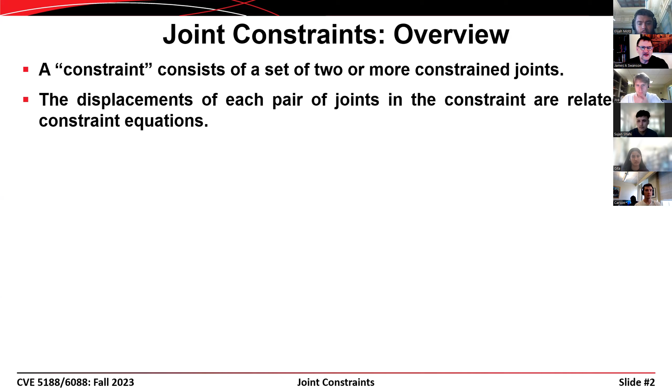When we used to offer a full 10-week course on matrix analysis of structures, we would do that sort of thing. But nowadays, when I'm only having 5 lectures on matrix analysis, I don't get that far anymore.

All right, so the types of behavior that we like to model are rigid body behavior, equal displacement behavior, or symmetry or anti-symmetry conditions. Sometimes it's more efficient to only model half of a structure so that the model size remains small, and then you can impose a symmetry constraint there such that all the displacements remain in plane like they would in a symmetric structure.

And you guys, I think, talked about that a little bit in your undergraduate analysis courses, where you talk about how to make problem sizes a little bit smaller.

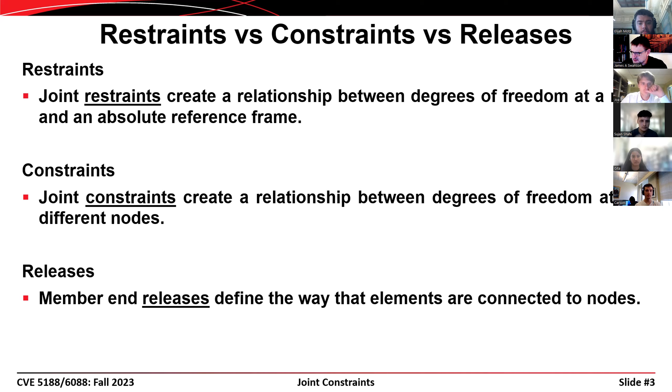So here are the others that I mentioned. A restraint defines a relationship between a node and an absolute reference frame, and a constraint defines a relationship between a node and another node. And then there's a release that allows us to incorporate things like pins and things like that.

So these are the types of constraints that are included in SAP 2000. We have a rigid body, we have a rigid diaphragm, a rigid plate, a rigid rod, and a rigid beam. And so I'm not necessarily in love with the names that the people at Computers and Structures gave to these different constraint types, but this is what we have to work with.

If you go into other packages like Abaqus or ANSYS, they have constraints that we use all the time.

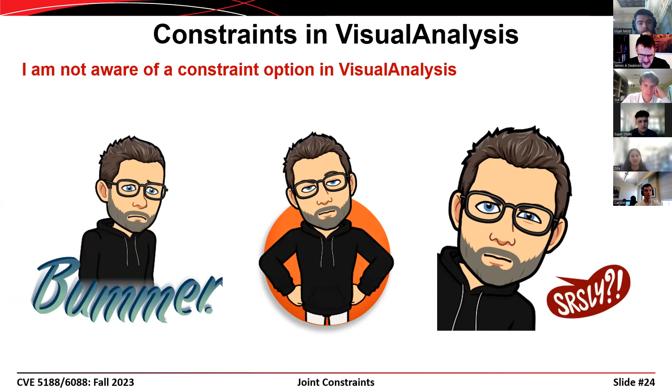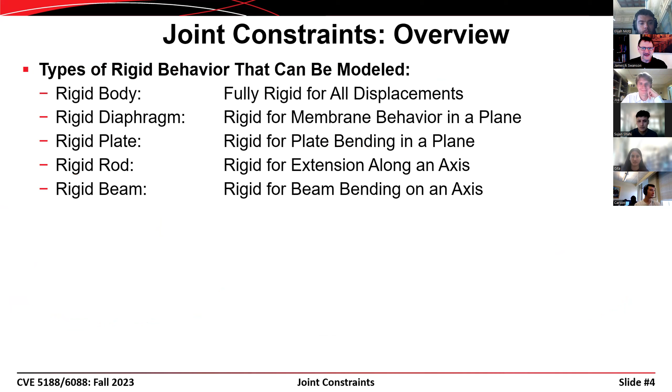They go by different names in those packages, but they are basically the same types of constraints. You'll find out on the last slide that when we look at VisualAnalysis, there aren't any constraints available, which is a serious limitation. But VisualAnalysis is what it is. It's a good low-level package for introductory level stuff. Let's hope the people from IES Web don't tune into this recording and yank our educational version, because I'm not entirely supportive of the package.

When we use constraints, it reduces the number of simultaneous equations we have to solve. So if you start with, say, 9 degrees of freedom in a model, and you say that degree of freedom 3 has to equal degree of freedom 5, you've removed one of the unknowns from the system. Instead of a 9 by 9 system of equations, you now have an 8 by 8 system remaining. So that's one advantage to using constraints, making the problem size smaller.

But more often than not, we're going to use constraints to model a condition academically or analytically in a way that's different than what it's actually portrayed in the actual structure.

Most constraints are defined with respect to a coordinate system, either the global coordinate system or a local coordinate system for a node or member, or an alternate coordinate system that can be defined specifically for that constraint. When we looked at diaphragm constraints on Tuesday and implemented them in our brace frame model, it automatically determined what the coordinate system was for those diaphragm constraints.

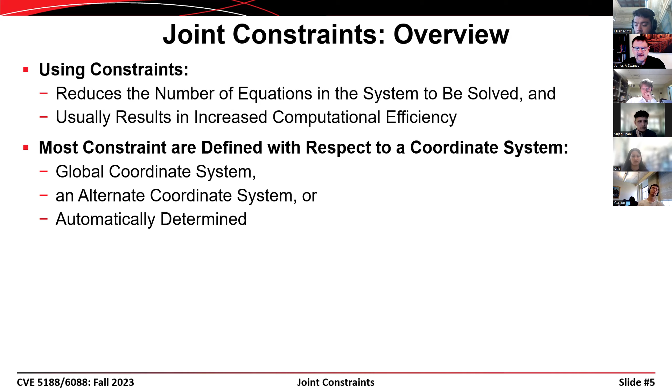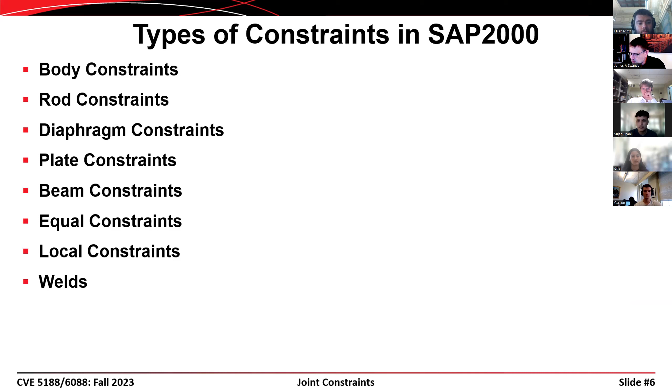So here, the body constraint, rod, diaphragm, plate, beam, equal, local, or welds - there are other ones I didn't include in the list before. Taking the descriptions from the SAP 2000 manual, the body constraint causes all of the constrained joints to move together as though they were a rigid body.

That can be useful if you're modeling the end of a beam, for example, and you want to connect the node at the end of a beam with a node at the column line. You can use that body constraint to impose rigid body motion of that group of nodes to mimic a rigid connection in a steel building, for example. All degrees of freedom are connected.

The subset of the degrees of freedom can also be defined. This is used to model rigid connections where several beams and columns frame together. It can be used to connect different parts of a model that were defined using separate meshes, and it can also be used to connect frame elements acting as eccentric stiffeners to shell elements. We haven't talked about shell elements yet, but that's coming up soon.

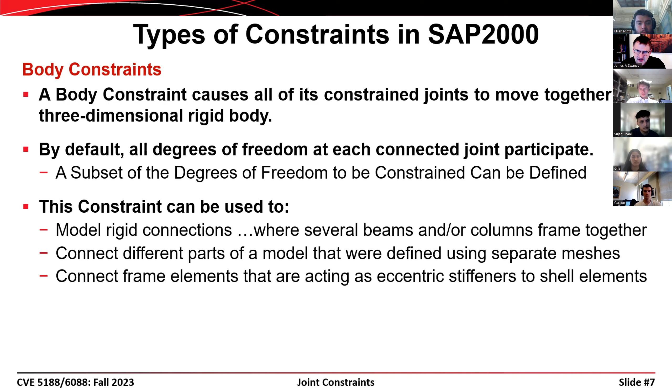There's a rod constraint that causes all of the constrained joints to move together as a straight rod that is rigid against axial deformation. Effectively, all the joints maintain a fixed distance from each other, but translations normal to that axis and all rotations are unaffected. This can be used to prevent axial deformations in frame elements, model truss-like links, and it can actually be used to model diaphragm behavior as well.

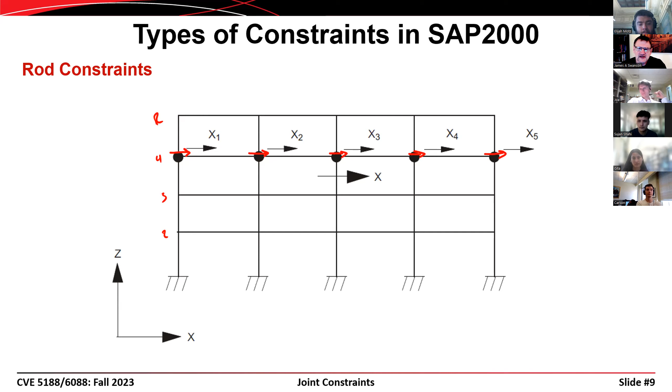What that says is the horizontal displacement at each one is going to be equal to each other. You'll end up with some displacement delta, and it's the same at all 5 joints. If you impose a rod constraint at each of the 4 levels in this structure, that would be equivalent to defining diaphragm behavior for each of those 4 levels. That works well in a 2-dimensional structure, but the actual diaphragm constraint we'll talk about in a minute is more elegant in performing that. So if the axial deformations in beams are negligible, a single rod constraint can be defined constraining the 5 joints.

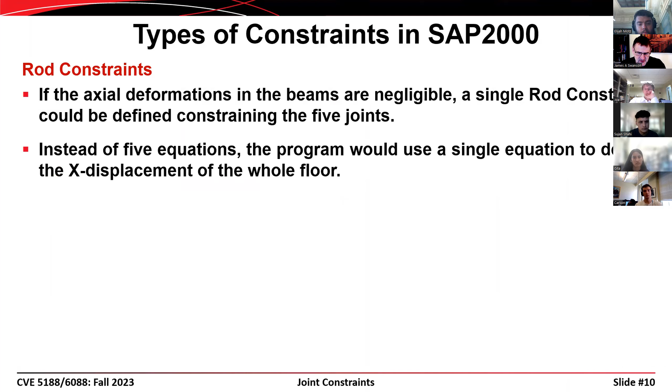Instead of 5 equations, the program would use a single equation to define the X displacement at that whole floor. However, it should be noted that the axial forces that result from that analysis in those beams will be equal to 0. So if you're worried about diaphragm forces, in-plane forces within the floor slab or roof slab, then that rod constraint can give results that are not accurate when you go in and design those diaphragm members for chord forces and things like that.

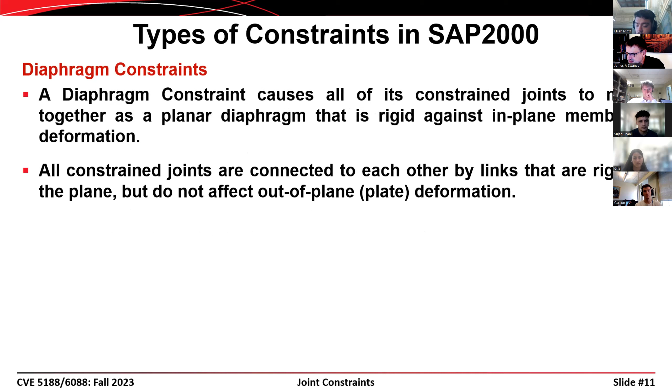Okay, here's the diaphragm constraint. This is by far the one we'll use most often in this class. It causes all of the constrained joints to move together as a planar diaphragm that is rigid against in-plane membrane deformations. All constrained joints are connected to each other by links that are rigid in the plane, but they do not affect out-of-plane deformations, either vertical deformation or rotation.

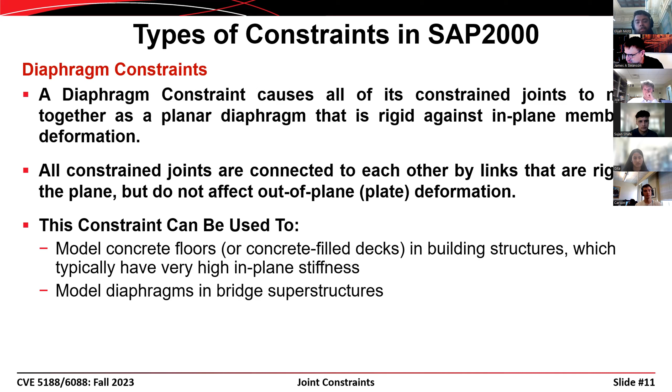This constraint is used to model concrete floors or concrete-filled decks in building structures, which behave with a high in-plane stiffness. They can be used to model diaphragms in bridge superstructures as well.

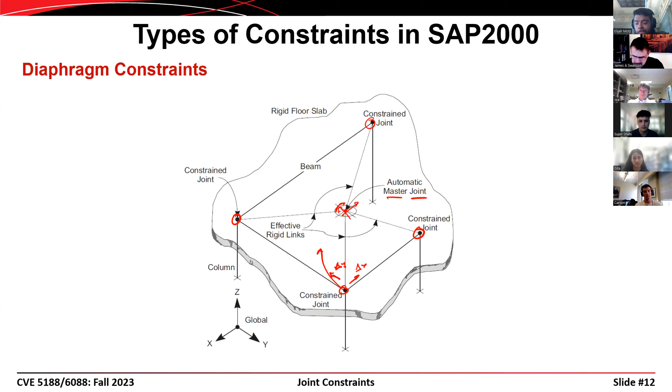And so that's very useful, very helpful, in that everything is taken care of automatically after you define the constraint and assign the joints to that constraint definition.

All right, the use of the diaphragm constraint for building structures eliminates the numerical inaccuracies that can result when you have large in-plane stiffness modeled using membrane elements. You could also use shell elements to model the floors or the roof. We'll do that. But sometimes, even if you have shell elements, it's nice to use a diaphragm constraint.

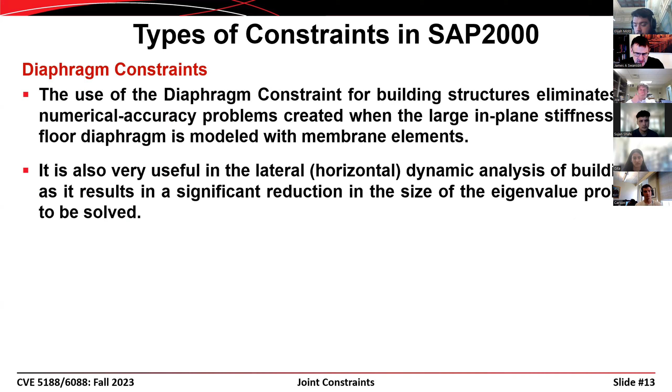It's also useful for lateral analysis of buildings as well. It results in a significant reduction in the size of the problem. And it has an added advantage in SAP 2000 in that it allows lateral loads to be applied much easier than in the absence of a diaphragm constraint.

I'll show you this when we get to SAP 2000 later today, but one of the last things we did in our model demonstration on Tuesday was we applied the lateral loads that were resulting from wind at each of the levels. That's rather tedious to do when you apply them as nodal loads or as joint loads. When we use a constraint, it becomes much more straightforward to do that. I'll get back to that.

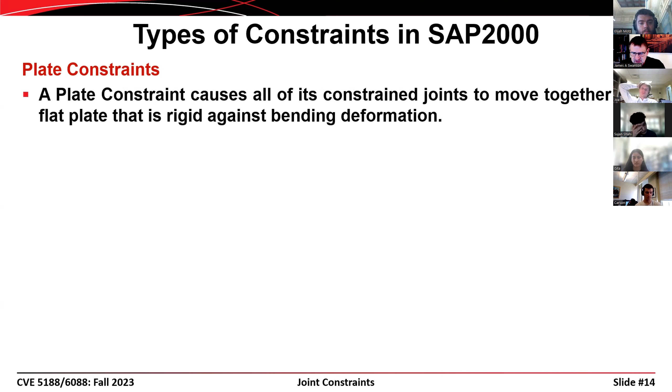Here's a plate constraint. The plate constraint causes all of the constrained joints to move together as a flat plate that is rigid against bending deformation. So this is a little bit different than the diaphragm constraint. With the diaphragm constraint, it's rigid in plane, but all of the nodes are free to do whatever they want perpendicular to that plane.

The plate constraint is basically the opposite of that. Everything is free to move around in the plane of the plate, but when it comes to out-of-plane deformations, then they are constrained.

This can be used to connect different types of frame and shell elements to solid elements. Solid elements don't have rotational degrees of freedom at their nodes. So this constraint can be used to connect a rotational degree of freedom from one node and pair it as a pair of translational degrees of freedom at other nodes.

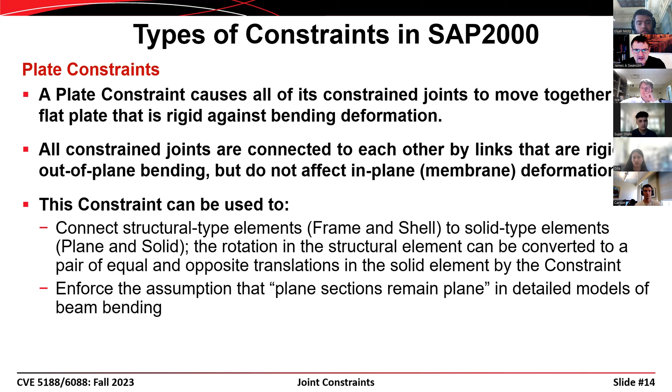It can also be used to enforce the assumption that plane sections remain plane if you do a detailed model of a beam using shell elements or solid elements.

Here's a beam constraint that causes all of the constrained joints to move together as a straight beam that is rigid against deformation. So this is the 2-dimensional equivalent of the 3-dimensional plate constraint. If you only have it working in 2 dimensions, then you can use the beam constraint instead of the plate constraint, and it's a little less

computationally expensive. So the analogy could be created between a beam constraint versus a plate constraint, relative to a rod constraint and a diaphragm constraint. So in 2 dimensions, you could use a rod.

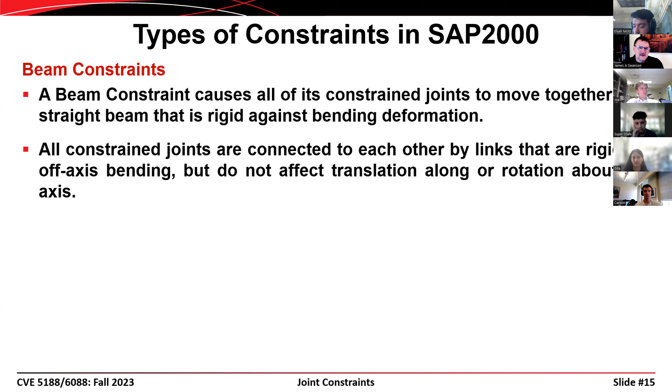In 3 dimensions, you use a diaphragm. In 2 dimensions, you use a beam. In 3 dimensions, you use a plate. Again, similar to what we just discussed with respect to the plate constraint, only working in 2 dimensions.

Then there's an equal constraint. This one is interesting. It basically sets the constrained degrees of freedom at adjacent nodes equal to each other. It's not like a rigid body constraint where if we had, say, 2 nodes and they were constrained using a rigid body, then they might move up like this, which would be a rigid body translation between those 2 nodes. Instead, if you have the equal constraint and both of these nodes rotate, then what tends to happen is this node moves up to here, and then this node moves up to here as well. So the degrees of freedom are actually equal to each other as opposed to moving as a rigid body.

There's no coupling between rotations and translations. This can be used to partially connect together different parts of a model, such as at expansion joints or at hinges and things of that nature. For fully connecting meshes, it's better to use the body constraint when the constrained joints are not exactly in the same locations. Here is a local constraint.

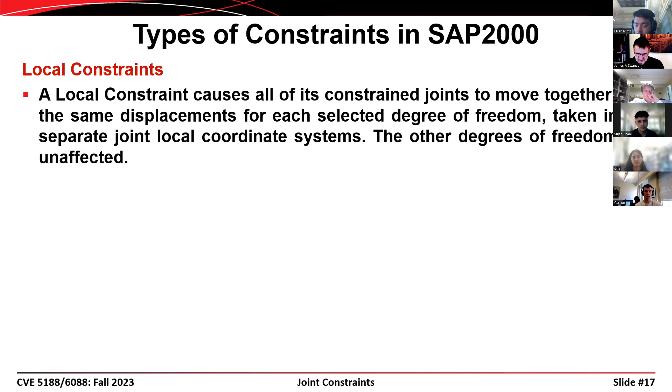Local constraint causes all of its constrained joints to move together with the same displacements for each selected degree of freedom, taken in separate joint local coordinate systems. The other degrees of freedom are unaffected. It doesn't use a fixed coordinate system, but references the local coordinate systems instead. There's no coupling between rotations and translations, and it works out to be the same as an equal constraint if all of the constrained joints have the same local coordinate system. So this can be used to model symmetry conditions. It can be used to model displacements constrained by mechanisms.

So let me go and illustrate. Let's suppose you have 2 nodes, one here and one here. And now we define degrees of freedom for these nodes. Maybe that's the 1 degree of freedom, maybe that's the 2 degree of freedom, and then that's the 3 degree of freedom. Over here, then you could have that perhaps as the 1 degree of freedom, that's the 2 degree of freedom, and then that's the 3 degree of freedom.

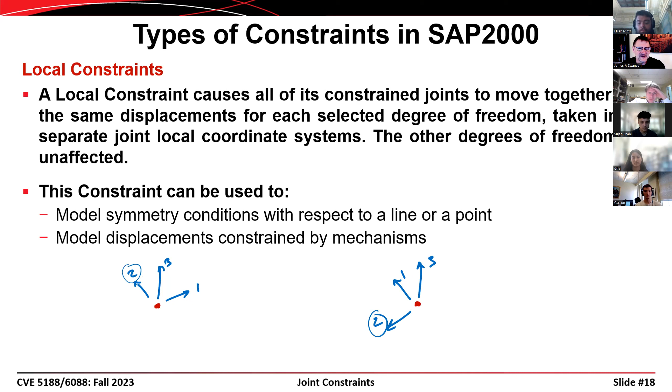So you could set displacement in the 2 degree of freedom over here equal to displacement in the 1 degree of freedom over there. That would be the same as an equal constraint. Or you could go and set the 2 degree of freedom there equal to the 2 degree of freedom there. I don't really know where you would use this, but it's available if you come up with some kind of an academic problem where that would be useful.

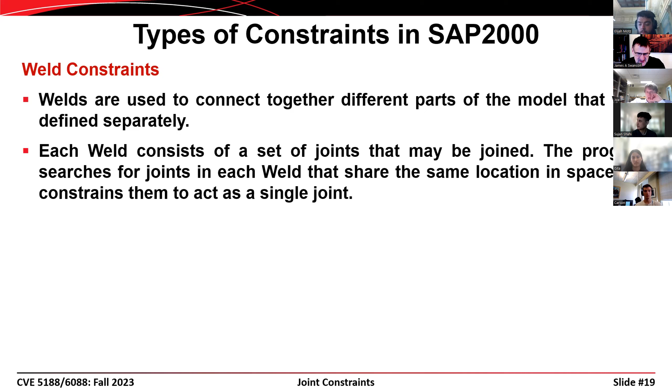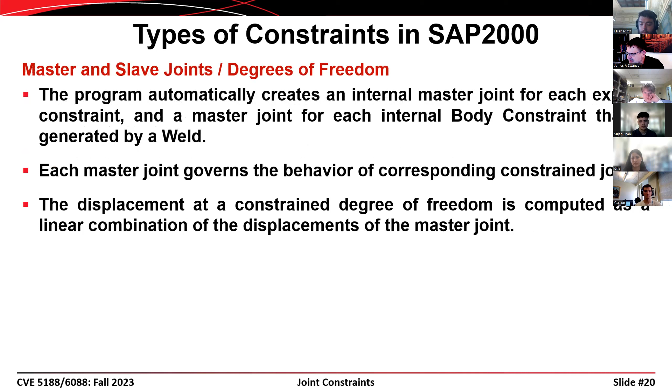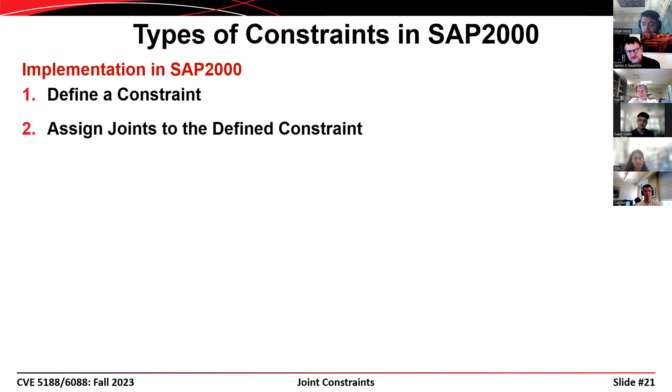So when we go in and look at these in SAP 2000, the process we use to implement a constraint in a model is: we have to define the constraint first, and then assign the joints to the constraint that we defined. In most cases, we're going to use a diaphragm type of constraint, and then we go in and assign the nodes that we want constrained to the diaphragm constraint that was defined. The way you do the first step is you go into the Define menu, Joint Constraints, and then you can define which type of constraint you want and which of the options you want to include.

Most of the time we construct our SAP models such that the z-axis is the vertical axis, so the perpendicular axis is going to be the z-axis — the axis perpendicular to the diaphragm that you're trying to model. You could also use a diaphragm constraint to model a wall, if the wall was rigid, and in that case you might want to use the x-axis or the y-axis to define the constraint plane instead. Or, if you have a bunch of nodes that you're going to assign to this constraint and they're already in a plane, then SAP 2000 will determine what that plane is and automatically determine what the constraint axis should be.

There's an option at the bottom that's usually quite helpful. If we have 8 floors in our building, in theory we'd have to define 8 different diaphragm constraints. But knowing that's something we commonly do, SAP 2000 includes an option where it will automatically create one constraint for each of the Z values of the assigned nodes.

Those of you who've done work in practice know these diaphragms are often rigid, but sometimes they're semi-rigid. What defines a semi-rigid diaphragm versus a rigid one is a topic for another class, but basically if you have a concrete deck, either a monolithic concrete slab or a concrete filled metal deck, that's going to be rigid in almost every case.

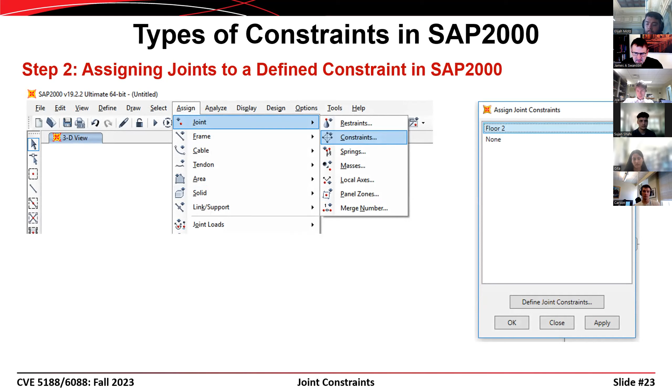I mentioned earlier that VisualAnalysis doesn't include constraints. It's not an option.

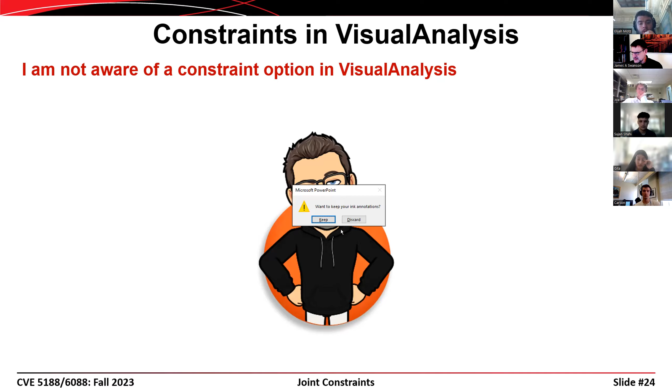ETABS does, of course. ETABS is basically just a tricked out version of SAP 2000, so just about every option available in SAP 2000 is available in ETABS in one way or another. I think all of the top shelf analysis packages have constraints included of one form or another. You guys know by now I've really dug deep into SAP 2000. I haven't dug nearly as deep into many other packages, but all the best ones I've worked with do have diaphragm constraints or constraints of some sort.

Let me stop sharing here. Any questions at this point while I shift gears over to my other computer?

Let's see, I thought I had SAP running, but I don't. It takes a minute to launch. Even though I have a commuter license on this computer, it doesn't have to go to the license server, which is nice because then I don't have to run the VPN when I don't want to.

There it is. All right, so here's SAP 2000. Let me go ahead and open the model we were tinkering with last time, Tower of Terror 2D brace frame. This is the same model we were playing with last time. I haven't done anything to it since we worked together.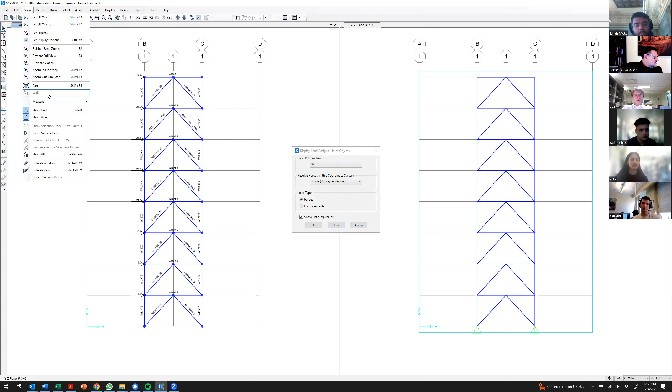Let me go in here. I want to show you the loads we had on here. All we did was define the wind loads, and I set them up as a nodal load in this model. Let's go ahead and show those. You can see these arrows here, though it doesn't come out very well. Let me get rid of the grid. There we go, now you can see a little bit better.

So I went in and defined those as nodal loads, and it became a little bit tedious because I had to go in, select each node, then type in the right value of the load, et cetera. Let me go over here for a second. I want to, in this model, let me get rid of the grid too.

View, show grid, Control D, I should remember that. Let me go in, I want to show the nodes, make those visible.

Hit apply, there, the nodes come in. Now I want to go up here in that window. I want to show miscellaneous object assignments, and show the constraints. So I can go in and show each of these diaphragm constraints. Every node that's assigned to the diaphragm constraint at Z equals 100 feet just turned green. I could do the same thing here with the diaphragm constraint automatically defined at Z equals 50 feet, and it looks like that.

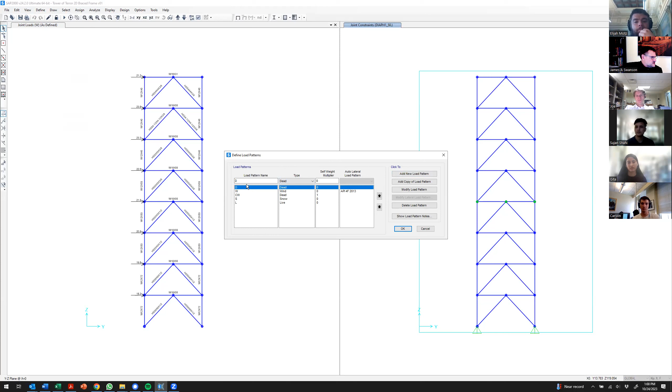Now, one of the benefits to this is in how we apply those lateral loads. Let me go in here to define, I'll go to load patterns. Let me do something a little bit strange. I'm going to define a new wind pattern. I'm going to call it wind DIA instead.

And it's going to be a wind load here. Now I have the option of applying an automatic lateral load. So what I'm going to do is go down here to user defined, hit add new load pattern. Then I can go in and modify the lateral load assigned to that. It gives me this convenient table where I can go in and specify force in the X direction, a force in the Y direction, or a moment about the Z axis at each of the levels for which a diaphragm constraint was defined.

So now, instead of going in and defining these loads one node at a time, I can go in like this, quick and easy, and define my diaphragm loads really easy. So let's see, 21.2 there. Here we'll go, 23.9. Hit the down arrow twice, 23.3. This is going to be 22.6, 21.8, 20.8, 19.6, and then the last diaphragm is 18.2.

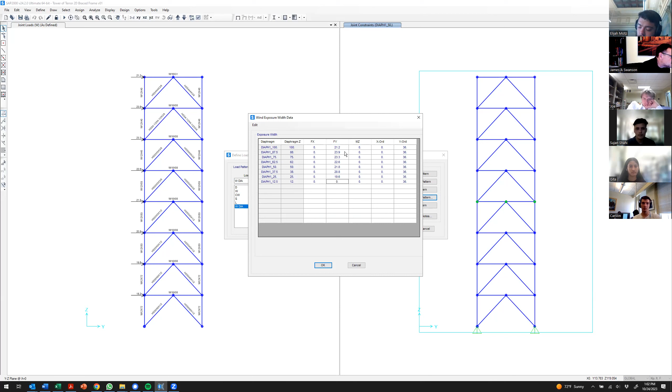And if I do that, hit OK there, now I can go in and run my analysis again. It's going to give me results both from the wind loads that are defined as nodal forces, and results for the wind loads that are defined using the diaphragm constraints.

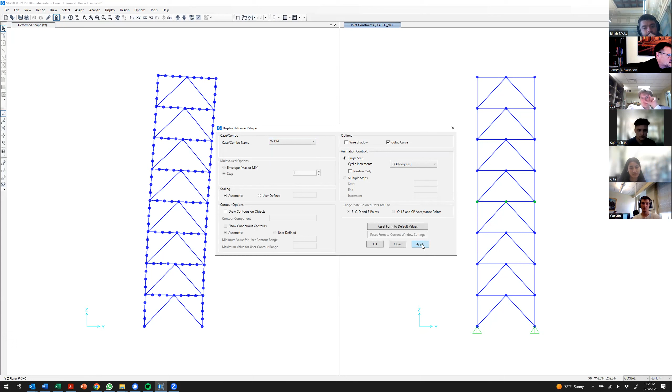Let me go in and look at the deformed shape. Over here on the left I'll go to W, hit apply. Over here on the right I'll go to WDIA, hit apply again. Let's go to inches here, and what I hope is that I get the same results. So here I get a displacement in the two direction of 2.305 inches. Over here, I get a displacement in the two direction of 2.305 inches as well.

So one of the best secondary benefits of having diaphragm constraints in the model is that it's so much easier to define lateral loads. That benefit alone is almost worth the price of doing business with respect to these guys.

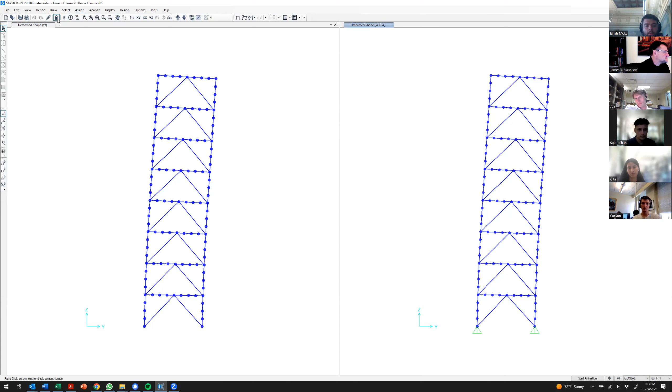All right, questions? Get a drink of water.

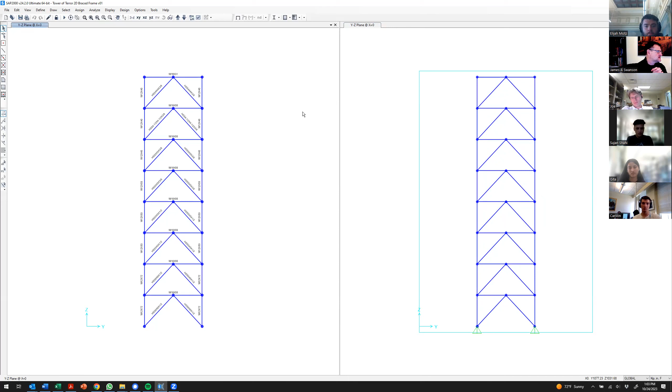So what I'm going to do next is take this model and morph it into a three-dimensional version of this model. I'm going to save it using a new file name. I'll go in, save as, and this is going to be Tower of Terror 3D brace frame, or 3D frame instead, like that.

So what I want to do is go over here and look at that in 3 dimensions. I hit the wrong one, that's fine. Let me bring the grid back in, view, show grid. And I need to edit that grid and expand it a little bit.

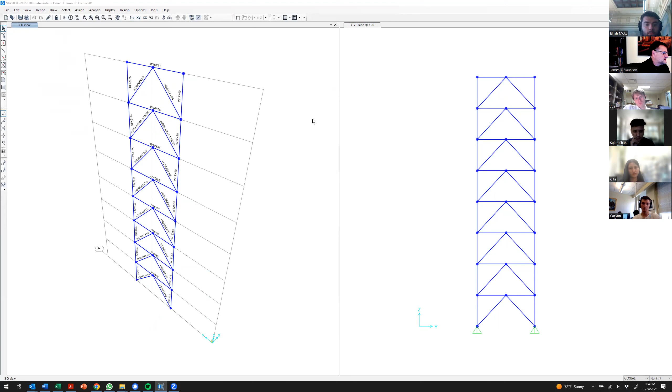Now, let me see if I can bring up my Tower of Terror definition. What day was it that we had class last? It was the 17th. There we go, that's the one I want.

All right, so here's the typical floor plan. I want grid lines in the X direction spaced at 32 feet, basically. So I want to modify that, I'm going to go in here, add, I need 4 of them. The ordinate there is 32. This is, we can go in and specify spacing instead.

So this is 32 feet, 32 feet, 32 feet. I think that'll do it. Let me go back here to ordinates. And yeah, I think that works out just fine.

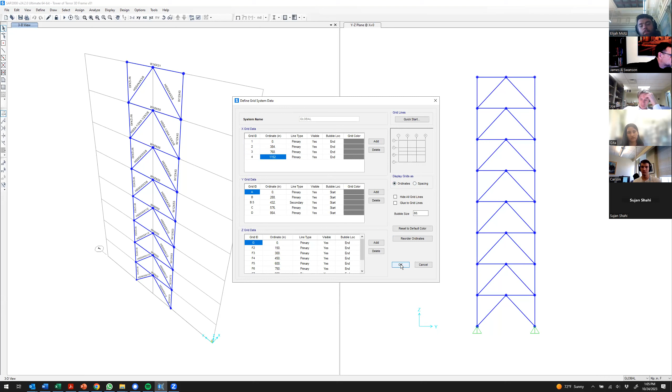Okay, hit OK. And there we go. Now I have that 3D grid.

So what I'm going to do is select everything in this first brace frame here, and copy it over to the right using the replicate command.

I want it to be in the X direction, 32 feet times 3 spaces. Let's do this, 32 feet, and then go back up and type times 3. That gives me 1,152 inches. I only want 1 copy. Hit apply. There we go.

So now I've got that brace frame modeled over there. Let me do this now. I want to look at framing line D. Let me zoom out here a little bit. That's not great, where did it go?

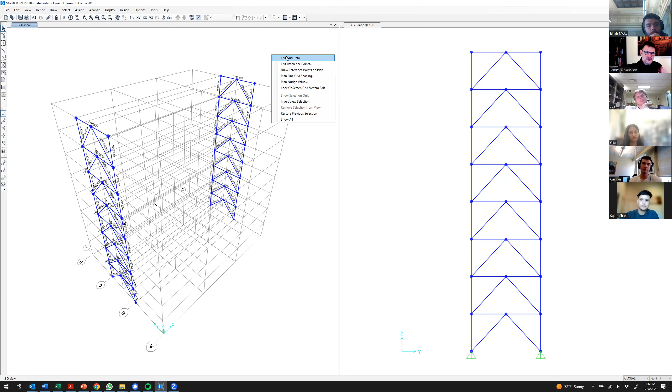Swanson, did that copy loads over too? Yes, when you replicated it. Yeah, if you don't specify anything else, it will copy loads over, which is not great for the lateral loads I had defined, but if I wanted to define gravity loads, that could be useful.

Now I want to give an elevation view of grid line A. If I look at this, I've got grid lines A through D there. Here I've got them, yeah, same. Okay, good.

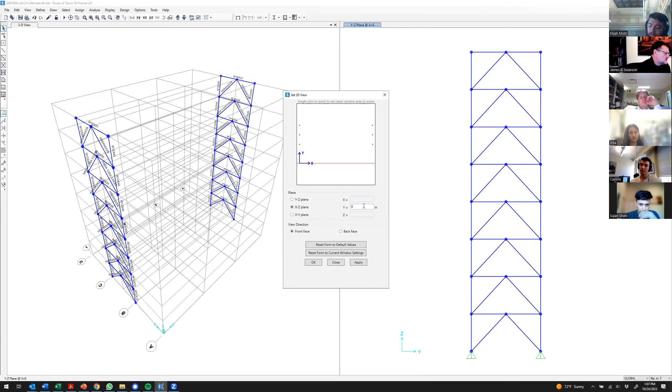So I'm going to go over here and set a 2-dimensional view. This lets me define what view I want to look at, so I want to look at the XZ plane at Y equals 0, which will give me an elevation view of framing line A.

Now it doesn't show anything there because I don't have any elements or objects defined on that. Let me go ahead and show the grid in that view. And now you can see that grid pop up.

Okay, so I'm going to define the moment resisting frame next. I think I have those members defined already: 12 by 190, 12 by 106, 12 by 58, and then the beams are defined as such.

In the interest of time, I'm just going to define them all as the same beam and let you guys go modify your model when you do this as a homework. If I took the time to specify them each as the right beam, that would cost me most of the rest of the hour, and I don't want to spend that time doing that.

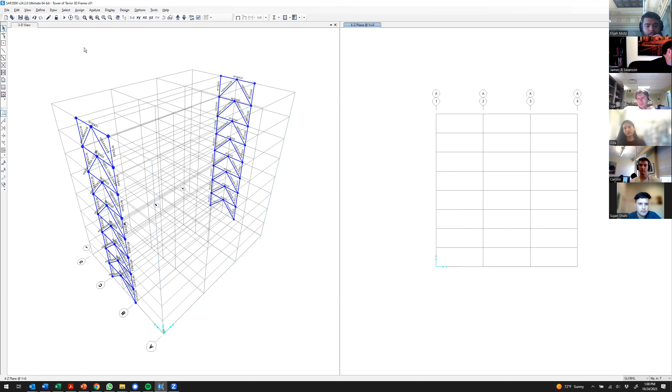So let me go ahead and draw in some members. I'm just going to use, let's see, what could I use for the columns? I'll go ahead and use the 12 by 72 as the column members. So I specify that column there like that. I'll go over here, do the same thing there.

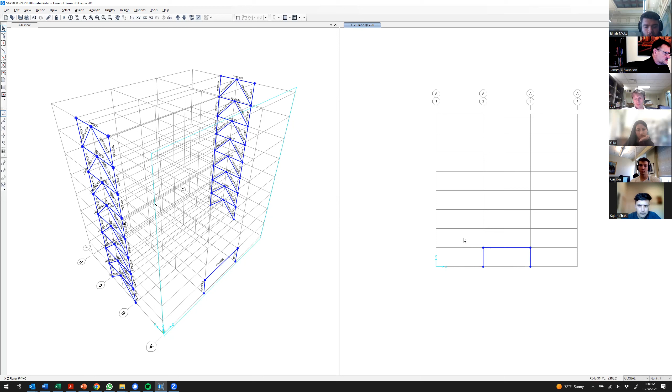Then for the beam, let's see, I'll use a W18 by 55 for the beam and go like that. Okay, now this is going to be the lateral framing in that direction. So let me select those members.

Okay, I'm going to hit Control R to replicate that in the Z direction. So this is 12.5 times 12, and I want 7 copies of that. Hit apply.

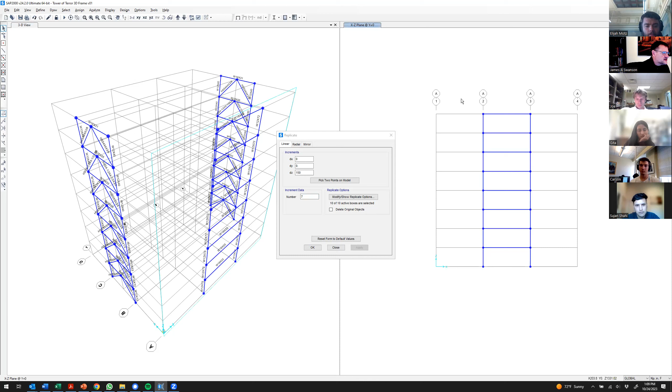And that gives me that moment frame. So now what I can do is select these guys again, and I want this to be in the Y direction now.

I want to copy from framing line A up to framing line D. So in this case, I want 24 times 12 times 3 - 24 feet, 12 inches per foot, 3 bays.

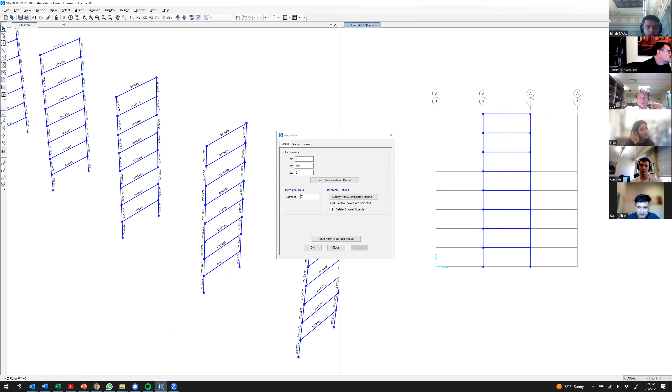I can hit apply, and then that - oops, I didn't want 7 copies. That's why they include the undo button. Where is it at? I just hit Control Z and get the same effect, I think. There we go, I only want 1 copy, not 7.

I got to select those members again. Hit apply. Why didn't it go? There it is.

Okay, now if I'm clever at this, I can use this as my model for the lateral framing. The rest of the members that go in here are just gravity framing - they're there to carry gravity loads down to the foundation, not to resist lateral loads.

If I'm clever, I can go in and select all of these joints and assign them to the joint constraint. Whoops, that's not what I wanted at all. I can assign them to the joint constraint that we defined last time.

So I've got a hiccup though - I've got to delete those constraints first and then start over again. So let me go into my constraints, joint constraint. Let me delete all of these constraints. I guess I have to do it one at a time.

Now I'm going to go in here, diaphragm constraint, add a new constraint. The constraint axis is Z. I'm going to define a new one at every Z level that's selected. Hit OK. Now I can go in and assign joint constraints and then go to the diaphragm, hit apply.

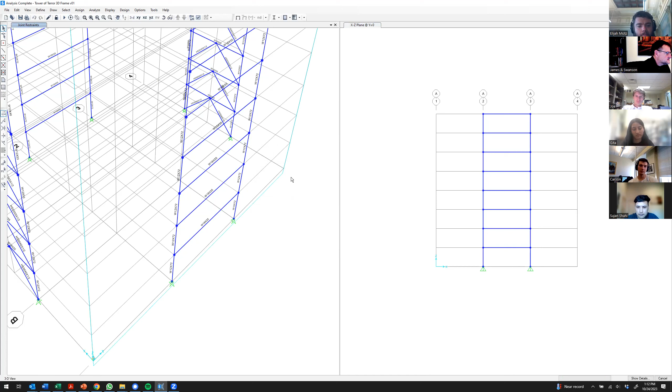And so we get our results, no warnings pop up, which is good. And one of the things you can see over here in the left view is this series of nodes that's defined along the center of the building. And so it looks like those are, I don't know, graphics artifacts or something like that, but they're really not.

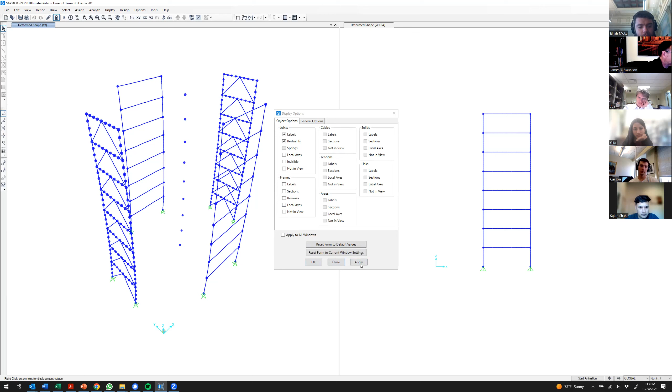Let me go in here to Control W. I want to show the labels on all of the nodes. It's taking a while. It's probably going to overheat my computer. Come on. Oh, I know what I need to do. I need to do this, go to the undeformed shape.

So those nodes are actually the automatically generated nodes that SAP uses as the master nodes for each of those diaphragm constraints. You see the tilde next to 201. That means it's a node that SAP automatically generated, and it's a node that it's using as the master node for the diaphragm constraint that exists at the roof level. And so this one down here is the automatically generated node that's used as the master node for the constraint at the second floor level. So that's what those are.

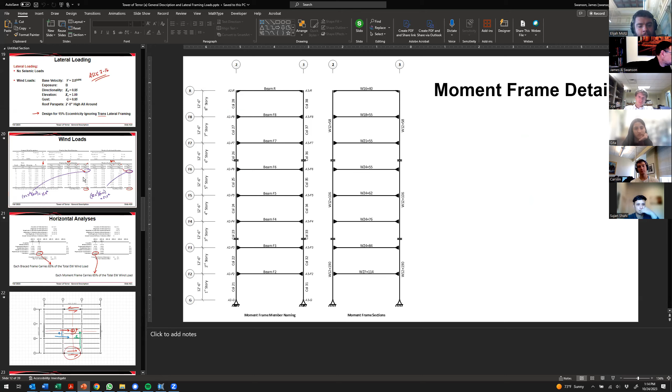And now if we go in and look at the deformed shape again, I'll use WDIA. Actually, I can't do that because I deleted those diaphragms and they moved away. Let's do this. Let's go back here to lateral load definitions here. And that's the slide I want. So I'm going to move that to another window so I can type these in faster. Let me kill this analysis results.

And we'll go in here to define load patterns. WDIA. Let me delete this one now. We don't need that. And we'll go in and modify that one. And so in the X direction, that's the load on the moment frame. So I've got 15.4. I've got 17.0.

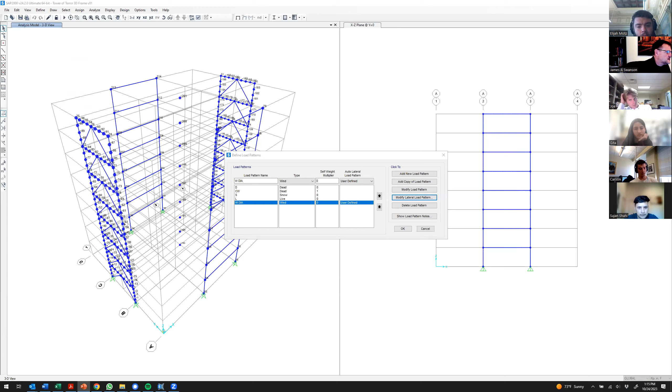Actually, no, I'm using the wrong loads. Let me correct myself. Let me go back to the spreadsheet that I was using. Here are the full values. I want these full values of these loads. I'm going to get rid of the ink. So I want to apply 23.7 instead. So let me fix that. Modify.

Okay, so in the X direction, I want 23.7. I want 26.2, 25.5, 24.6. I want 23.7. I want 22.6, 21.1, and then 19.5, and then the diaphragm at the ground level. That's moot.

At the Y direction, let's see, this is going to be 32.6. This is 36.8. This is 35.9, 34.8, 33.5, 32.0, 30.1, 28.0, and that's good. Now I'm applying these all at the same time. So I have my force in the X direction applied at the same time as my force in the Y direction.

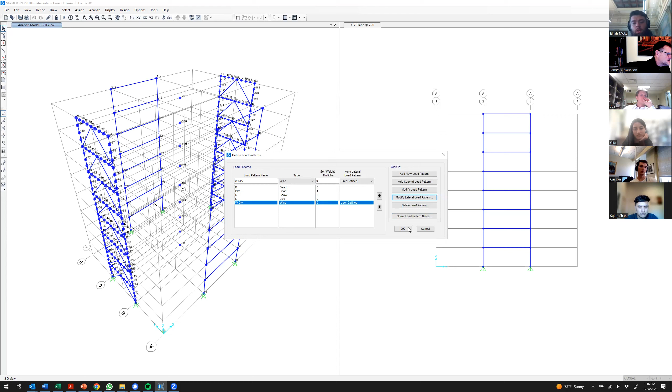Let's go ahead and look at the deformed shape that we get from that. So what we can see then, if we go in and look at the deformation, whoops, structure is ill. Yeah, great. Nothing ever works the way I want it to. Let's look at my deformation there due to that. So we can animate that.

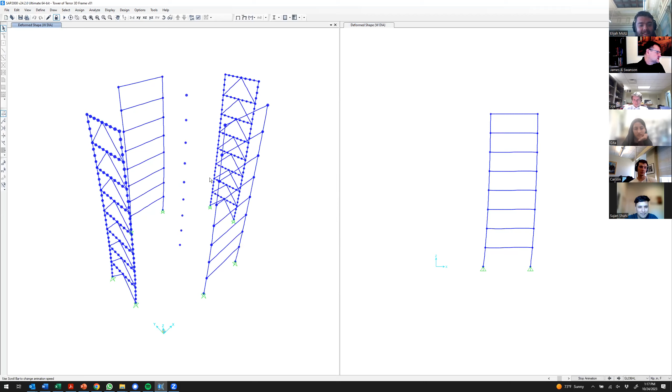I wouldn't want to rob you of the music that SAP puts on it, which is pretty horrible. But you can see that it's moving and it's moving together, so the diaphragm constraint is holding everything together.

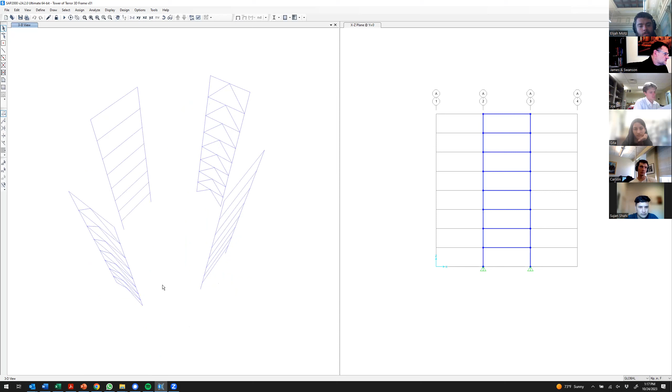All right, the next step in generating a 3D model for this would be to add in the gravity framing, not the lateral framing. What I'm going to do next is define the gravity framing at the first story and at the second floor level, then copy that all vertically. Let me take a near vertical view of this, look at the XY plane.

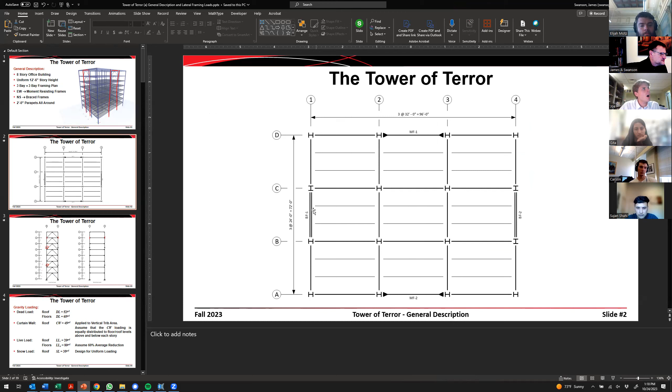I'm going to select all of these nodes here and assign them to a group. I'll define a new group - that frame up there, what did I call that? Moment frame 1, in the definition. So I have that frame on framing line D. That's going to be MF1, this is MF2, this is BF1, that's BF2. So I'm going to create a new group, call that moment frame 1, and then assign all of the members and nodes to that group.

I'm going to do the same thing down here. Let me clear that selection, get a new selection here. I'm going to define a new group, call that moment frame 2. Okay, hit OK, then hit OK again, then hit apply.

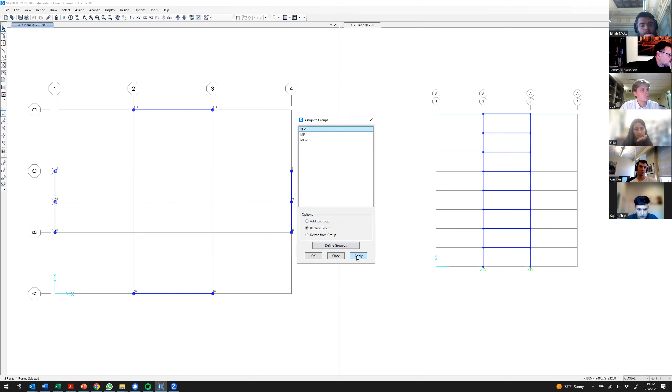Then I'm going to select these guys - that's brace frame 1. So I need to define a new group, call that BF-1. Hit OK, and assign those to BF1. Then over here, make that BF2. Add a new group, BF-2, hit OK, hit OK again, BF2, then apply.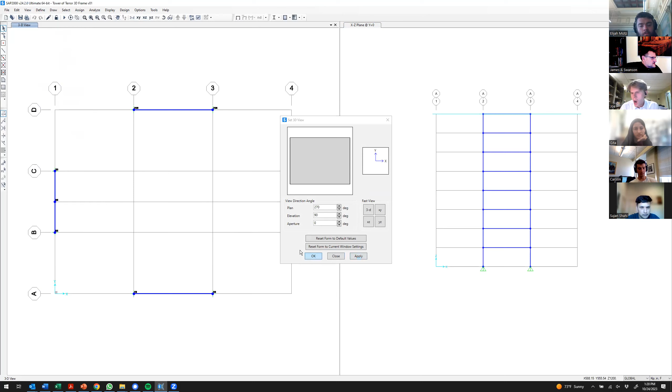Close. All right, now I can go into my view and show some groups and not others. Let me see where that is - View. There's a way where you can remove those groups, let me come back to that. I'm going to go back to a three-dimensional view over here. View, set 3D view, apply. This isn't working right.

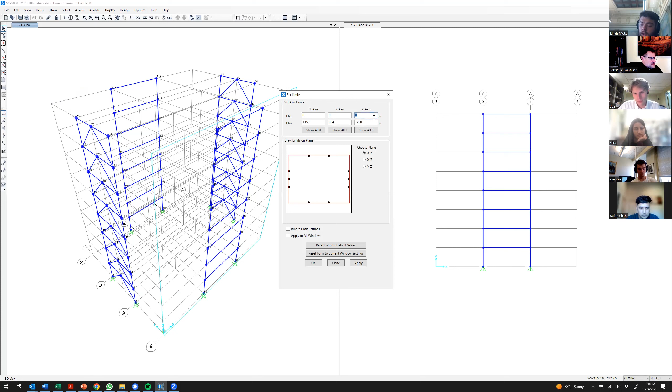There we go. Now I'm going to look at the first story of framing. Let me go to view, I want to set my 3D view, and set the limits on that view. In the Z axis, I want to set my display options to show everything from 0 to 12.5 feet. I hit apply, and that basically shows me a 3D view of the first story's worth of framing. I hit OK, and bring that up here, zoom in a little bit.

Now what I'm going to do is define the gravity columns that I have. There's a gravity column there, and then I can define one gravity column there like that. I probably should have defined them as the W section, but I didn't.

Let's see, I'm going to take that guy and replicate it. Let me work in feet instead of inches, that'll save me a couple of keystrokes. I'm going to replicate that guy, I want it to be in the Y direction, 24 times 3, I want one copy of it, hit apply. Okay, so that copied it over there.

Now I'm going to select that guy and that guy, and replicate that in the X direction. This is going to be 32 times 3, hit apply. And now I should have columns at the 4 nodes.

Yep, there they are. I'm going to do the same thing here at the center. I'm going to replicate that - DX, let's try this 32, 24. I think I have to do it one step at a time, so let me avoid that inevitable error. Then I can replicate that 0, 24.

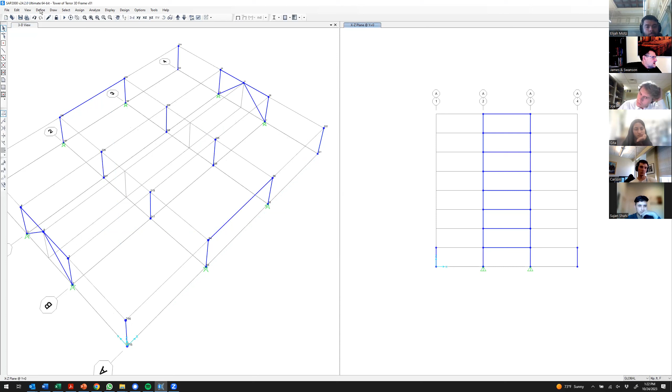Apply, okay good. Now what I can do is put in the beams. Let me define this over here - I'm going to go to a 2D view, and look at the XY plane at a value of Z equals 12.5 feet. Hit apply, and that gives me basically the plane at the second floor level. So now I can go in and define beams.

I'll go ahead and define it as 18 by 55, I'm going to use pinned. So now I'm going to define that beam like that, and now I'm going to replicate it. So if I go in and replicate that - come on, there we go.

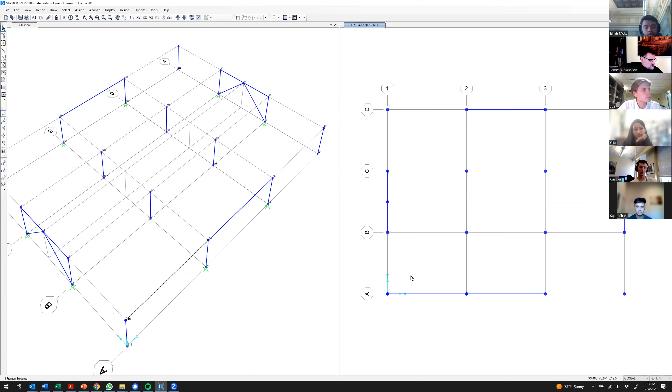Control R. Let's suppose that I want beams spaced 3 beams per bay, so I'm going to space it at 8 feet. And then what I'm going to end up with is 1, 2, 3, 4, 5, 6, 7, 8, 9 copies of that.

Hit apply, and you can see that it showed up in both views. Now I'm going to select all 10 of those beams and replicate it at a distance of 32 times 2, with this being 0, and I only want one copy. Then they pop up over there on the right where they're supposed to.

Let me select these interior beams here. I want those to be copied at a distance of 32 feet with one copy. There we go. Now what I'm missing are the girders.

Let me check this to make sure I have the releases defined the way that I want them to be. Yep, each of those beams is pinned at its end, so it's released the way that I want.

Let me go in now and define the girders. Close this, we'll use 18 by 35 girders, 18 by 55 girders as well. I want that to span between those two nodes like that. Let me adjust the properties of that.

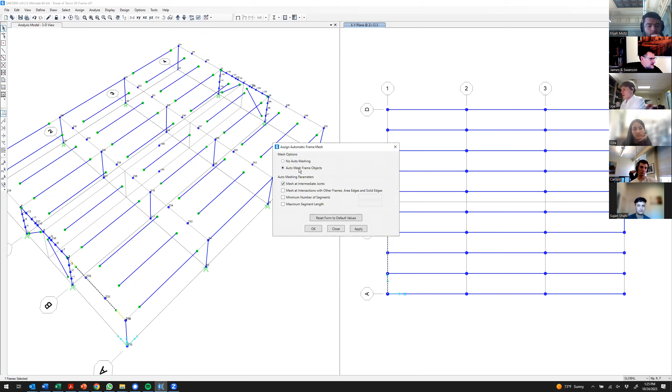What I want to do is make sure that each of these frames is set up so that it automatically meshes at intermediate joints, and it is. You could also set up your other automatic meshing at this point too, before you copy.

Close. Let me go ahead and take that guy and replicate it. I want that to go at dx equals 32 feet, and I want 3 copies of it. So that moves it over there.

Now let me select just those girders. I'm going to drag from right to left to select those 4 girders, and copy at a distance of 24 times 2. I want 1 copy. Hit apply. Okay, that copies them over there.

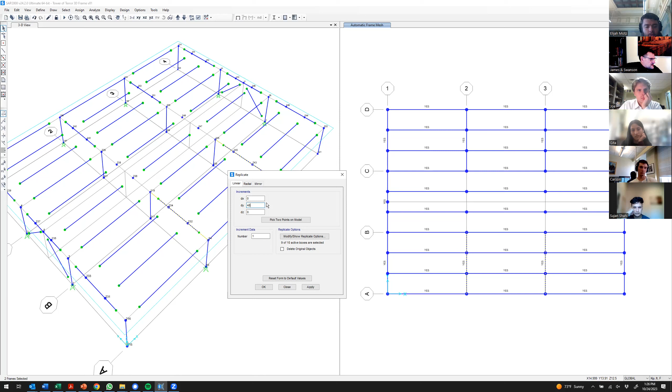And now I've got the interiors here. That's going to be at a distance of 24 feet with 1 copy. Hit apply again. Close. And you can see now I have my girders.

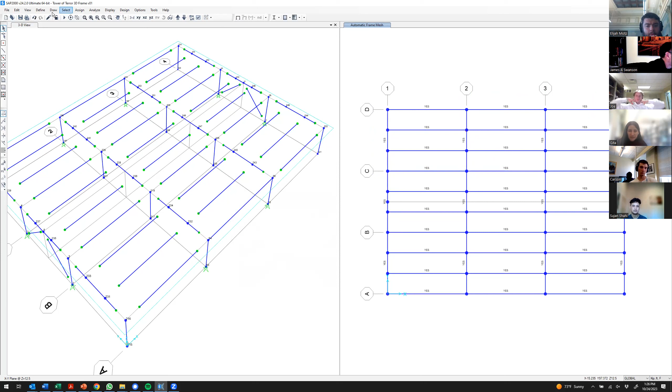So now what I can do is select just about all of the members in this floor. I don't want to select the beams that are part of the moment frame, and I don't want to select the beams that are part of the brace frame. So let me go here to my view, this is where I wanted to turn off the members that are in the moment frames and the brace frames.

Where is it at? Here it is. Select groups. Let's see, brace frames 1 through brace frames 4, let's select those. It's not working the way I wanted it to. Show selection only. View, show selection. Yep, that didn't work.

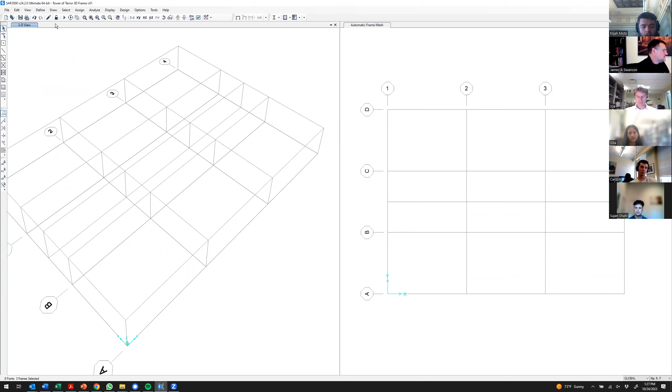All right, let's go back to plan. I'm just going to select these guys by hand. 1, 2, 3, 4, 5, 6.

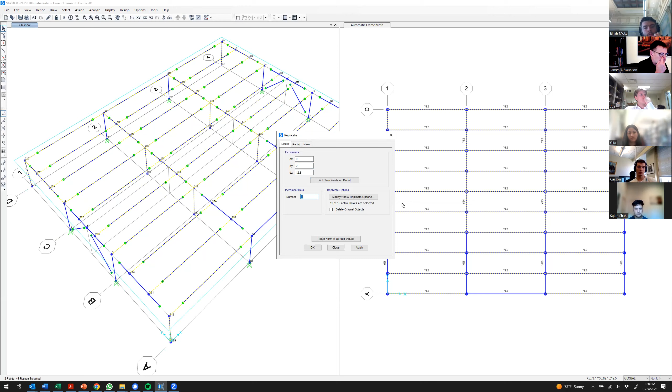Okay, I'm going to replicate those members. This is going to be in the Z direction at a distance of 12.5 feet. And what do I want, do I want 7 copies or 8 copies? So I have 1, 2, 3, 4, 5, 6, 7 copies.

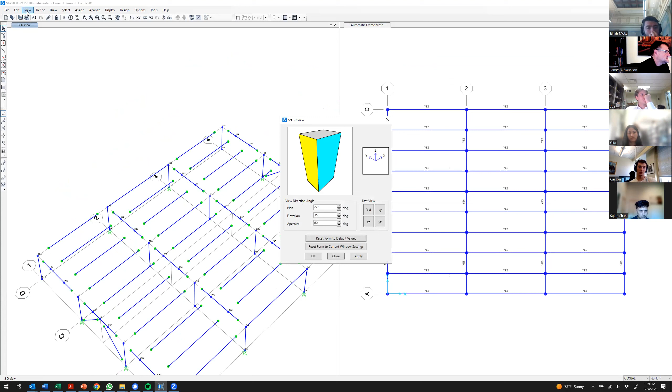Hit apply, and it looks like nothing happens because of the way I have my view set up. Let me go here to view, set the limits, and show all Z. Hit apply, and we get that.

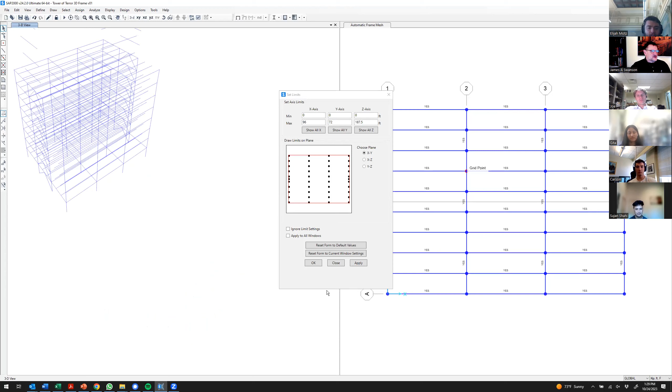All right, well, that didn't work exactly the way I wanted it to. Still, hopefully this had some value. So if you're constructing a 3-dimensional model in SAP 2000, that's one of the ways to do it: define one level of framing and then copy it vertically. This was a little bit convoluted because I already had the different levels within the 2D, within the brace frames and the moment frame set, and I ended up with some extraneous results here.

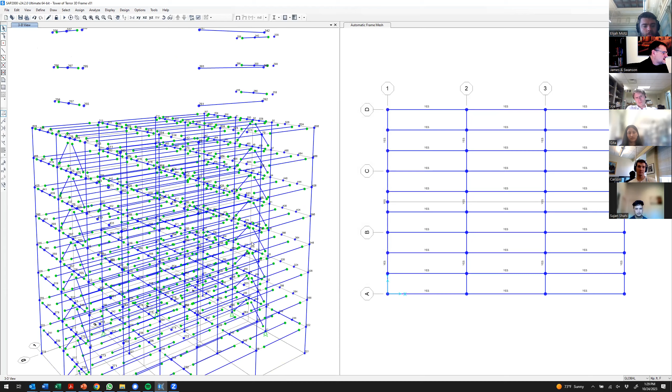I'm out of time. What I'll do is take a few minutes and figure out what I did wrong and fix it, and then I'll start with that model next time and show you the next few steps in this.